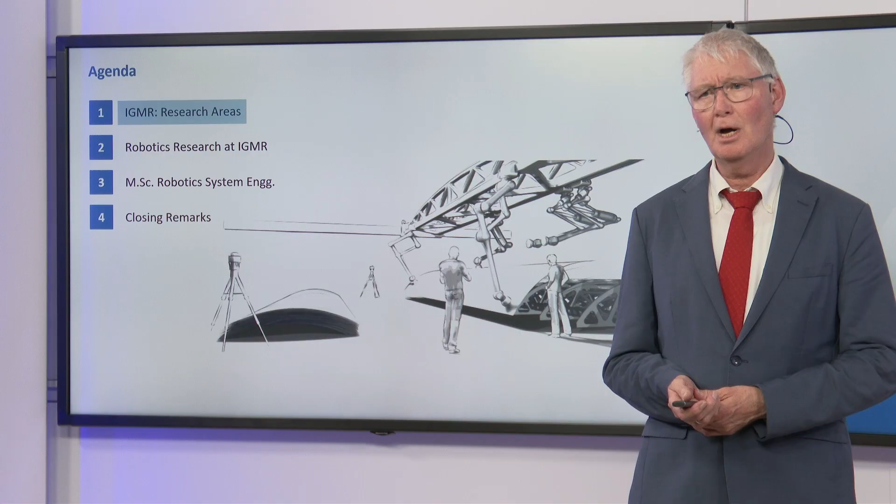The video you see right now shows the collective building of mechanical engineering. To show the size of mechanical engineering at Aachen University, this building, even though it's an 8-story building, houses just about 5 to 10% of mechanical engineering. There are a lot of other buildings where you find activities of the mechanical engineering faculty.

What you also see in this video is a bit of the historic scenery in Aachen. Aachen is originally a Roman foundation, more than 2,000 years old, and I just saw some news showing they excavated some human remains, possibly Roman, but maybe only Middle-Age remains, on one of the central plazas in Aachen.

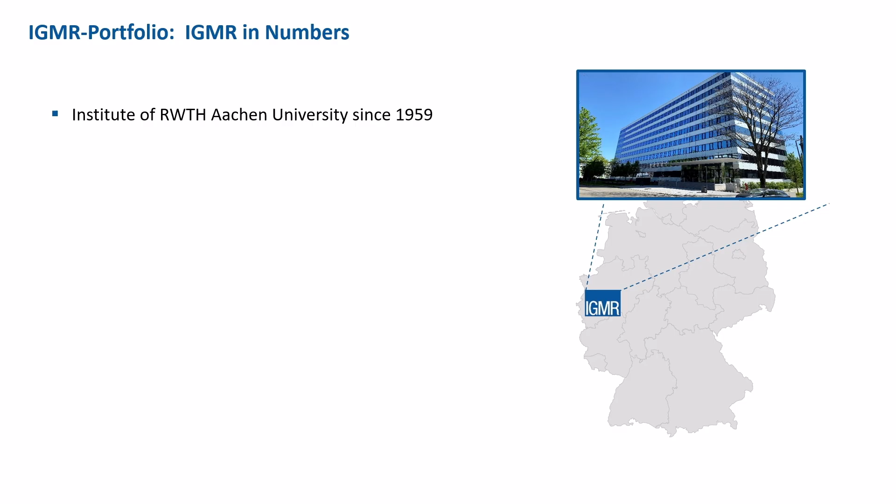My institute is not as old as that—it was founded in 1959. We are located close to Belgium and the Netherlands, in the westernmost part of Germany. So when you come to Aachen, you not only experience German culture, but also Belgian and Dutch culture. There are some similarities between these cultures, but it's a nice experience to also realize the differences.

Apart from me, there's also Professor Hüsing teaching and researching at IGMR, and you will meet him in at least 2 of the lectures offered within the Robotic Systems Engineering Master. Altogether, we have 30 people as research staff, almost double that number in student assistants, which might be an interesting experience for you also.

After 1 or 2 terms, once you have some grades on your list, we will be able to judge if you can also take part in teaching or research related to robotics.

Typically our lectures reach more than 3,000 students per year, so that's quite a large number, and our revenue is about 2.5 million euros per year, which we spend on teaching, research, and especially research together with industry.

At IGMR, we are not only doing research in the area of robotics, but also in other areas. One of those is mechanism theory and kinematics—some of you might already have taken courses in that area, covering crank and rocker mechanisms, grippers, and slider crank mechanisms.

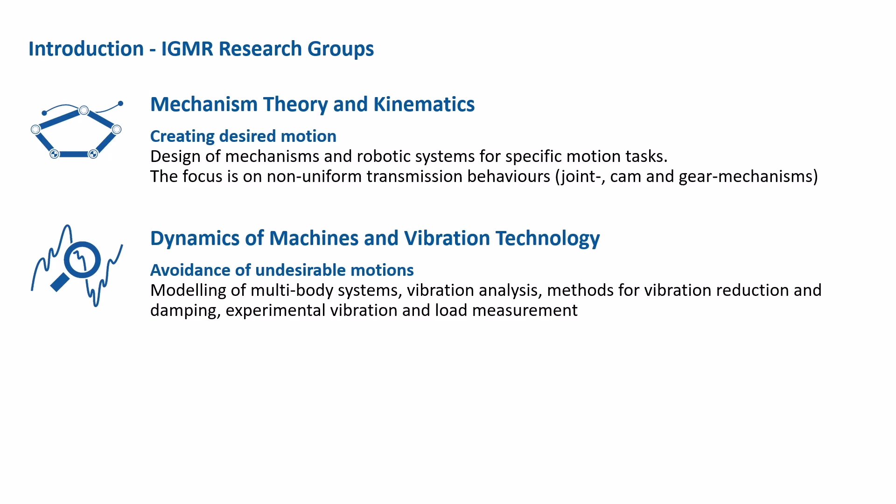We also deal a lot with dynamics of machines and vibration technology. I think you also know some specifics of dynamics, especially single degree of freedom, 2 degree of freedom, and multi-degree of freedom systems.

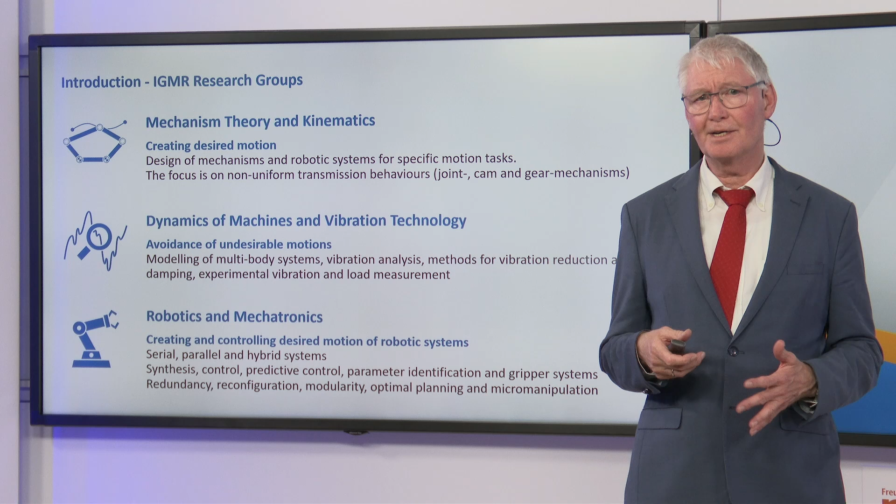And that is really by far the largest area in which we are doing research: robotics and mechatronics. But of course, all these three groups are not completely separated, but interact with each other, so that also in robotics, we take advantage of knowledge in mechanism theory and dynamics.

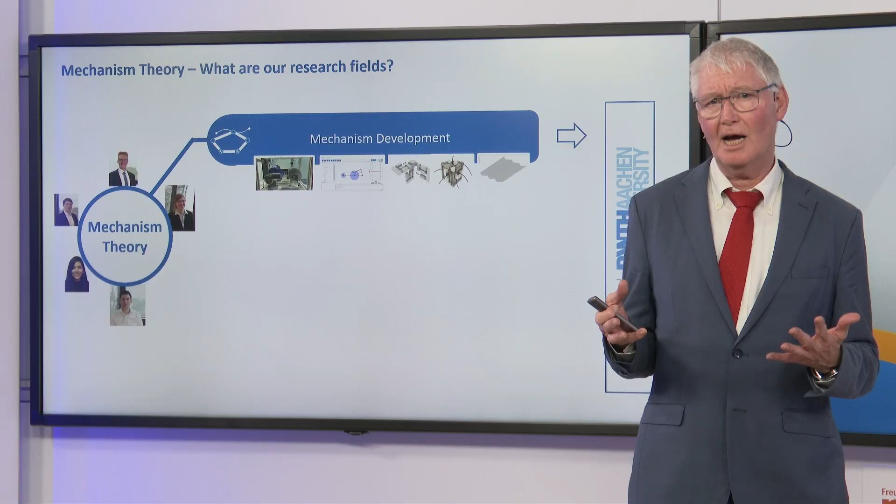The mechanism theory group deals with the development of different types of mechanisms, as I have mentioned before. Specifically, we are also developing software that enables designers who might not have full experience in mechanism theory to still develop solutions required for their machines and processes.

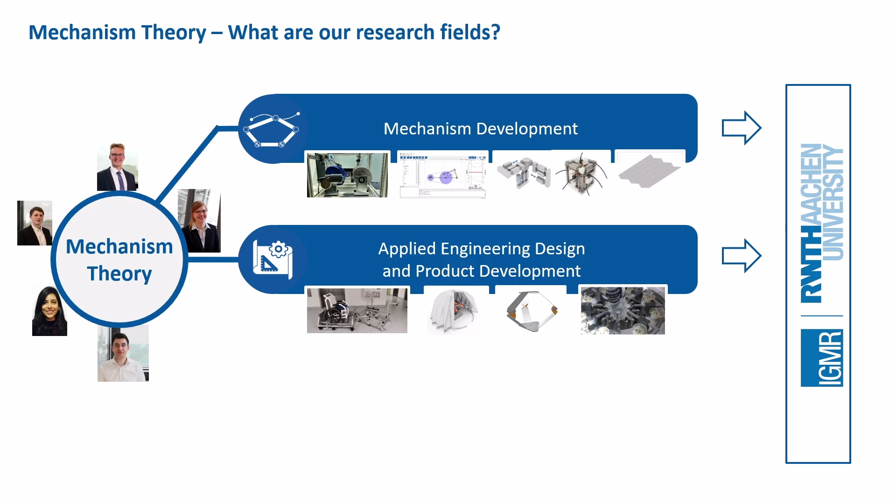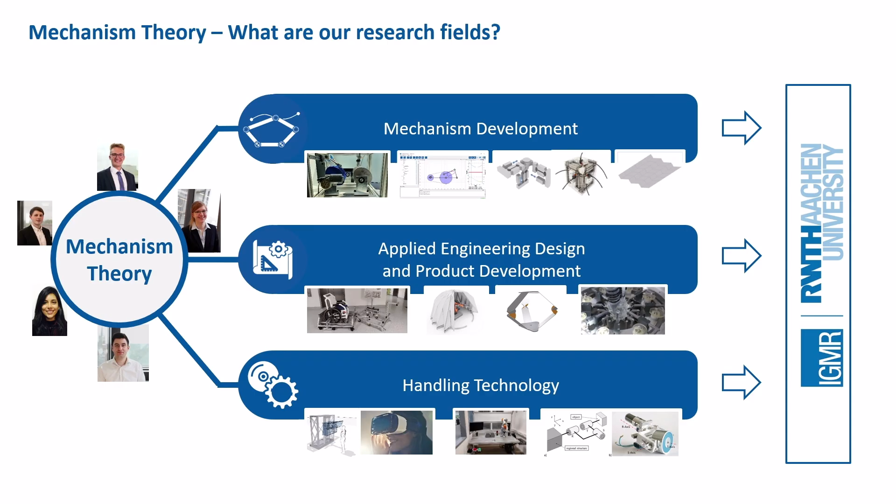Then we are also engaged in product development, but not only developing products, but also developing methods for product development. And then, as a link to robotics, we are also dealing within the mechanism theory group a lot in handling technologies. Handling technology means grippers and all kinds of end effectors that you want to use with a robot.

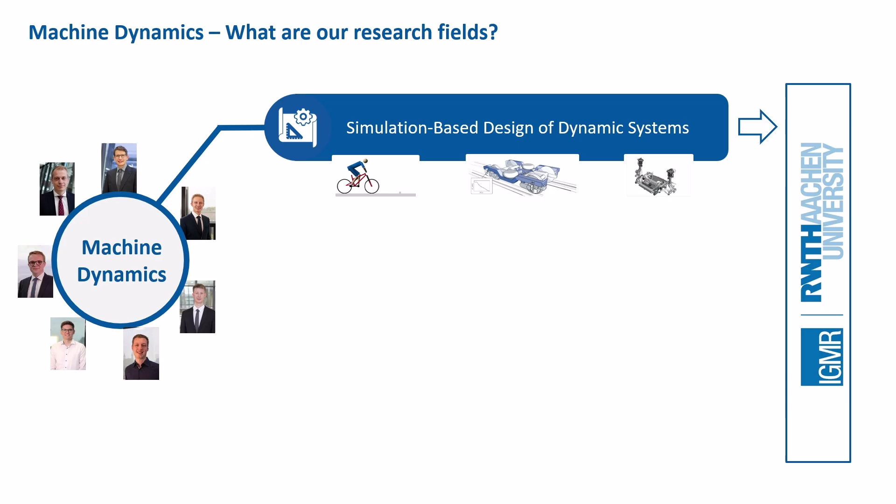I guess a lot of the students listening here from India are aware that there is a large program in India going on about creating new rail lines, also building new rail cars and locomotives, and that is really done together with the Siemens company especially.

And then on the right-hand side, you see a suspension system of a BMW, where we also did a lot of model-based, multi-body dynamics-based analysis of such a system, especially for driving simulators.

Then another part in dynamics which we do specifically is research in so-called pick-and-place robots, delta robots, and that is something that connects this dynamics group with robotics again.

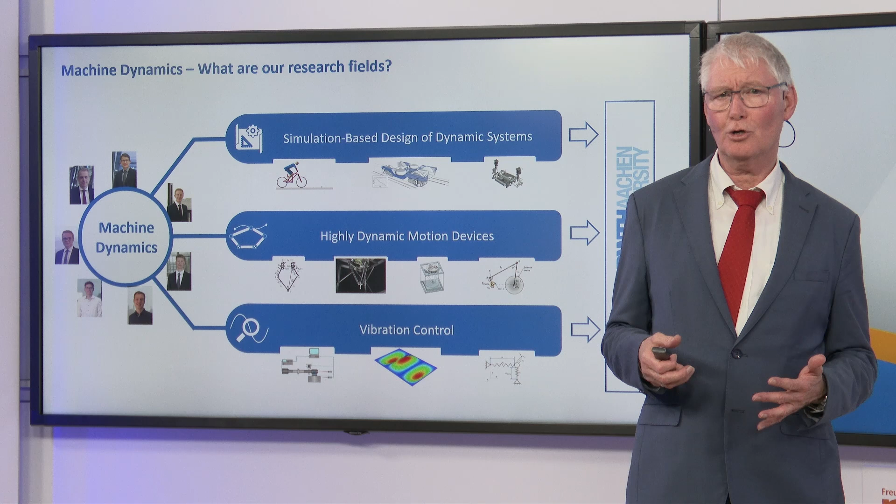And then we are also dealing a lot with vibration control, and talking about control, obviously control is sort of a necessity in all types of robotic research, because all the motions that you create with a robot need to be controlled in order that the system really functions well.

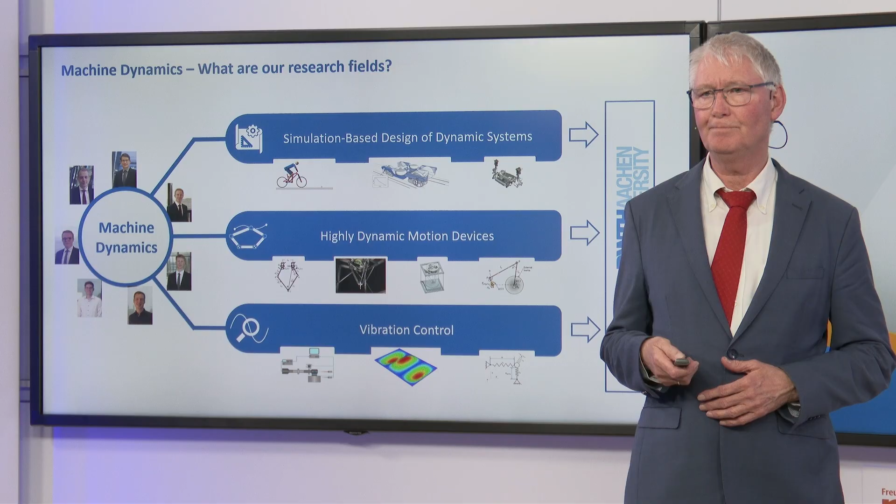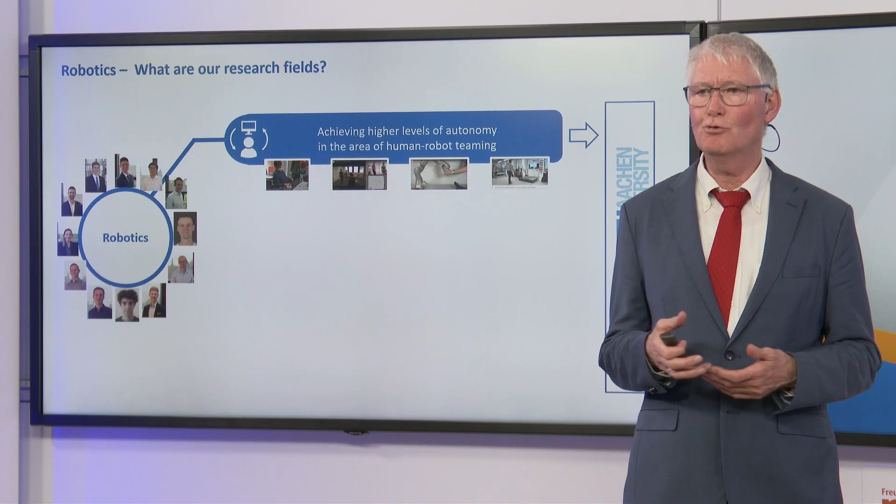Okay, so that is just a short overview about our research areas, and now I want to specifically show the robotic research. Of course, as already mentioned before, this is the largest group, and one part of the research we are doing in that area is to achieve higher levels of autonomy, especially in the area of human-robot teaming.

So I think you've learned already from news and so on, possibly with your own experience in robotics, that human-robot cooperation, collaboration is becoming more and more important. And of course, besides that, there are also new applications.

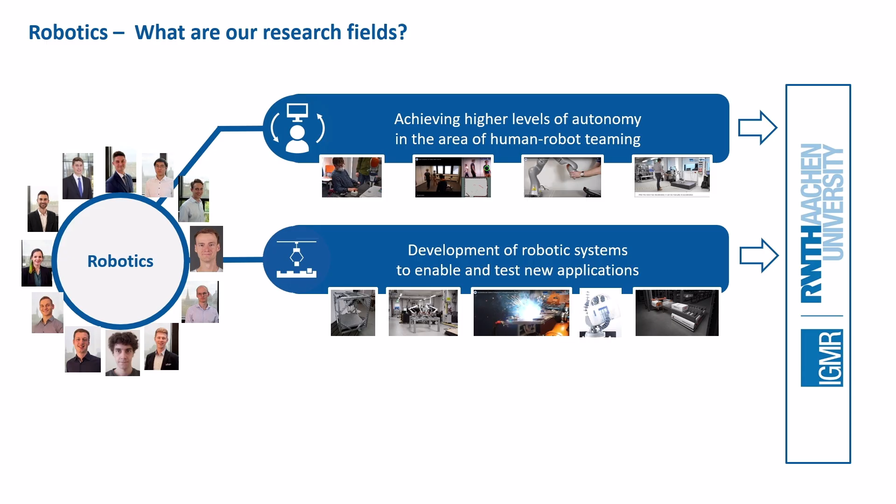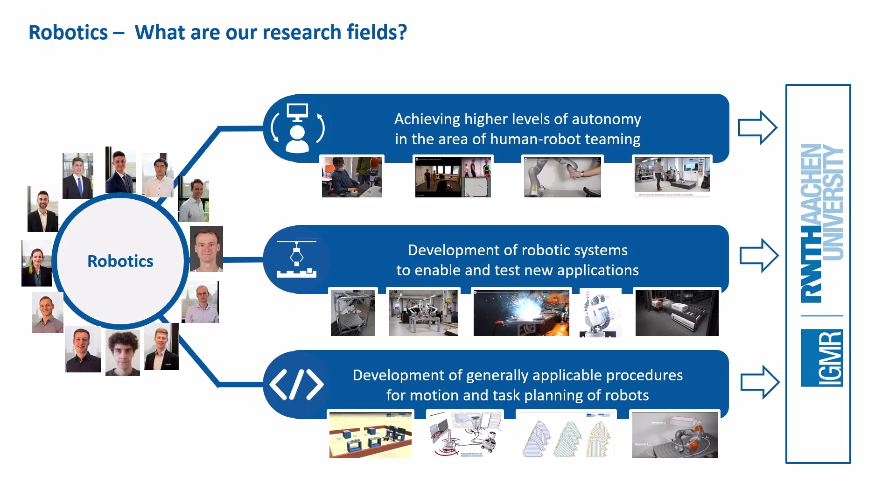We are dealing a lot with robotics in additive manufacturing, where we use the robot in order to improve additive manufacturing processes. And another thing that we are often doing is to develop procedures for motion and task planning.

And especially if we are talking about task planning, then it means that in a lot of scenarios, it's about a given state that needs to be transferred to another state. Possibly products are assembled and manufactured, and then we have to come up with a correct sequence of interactions between different agents. And such agents could either be robots, humans, machines, or mobile platforms.

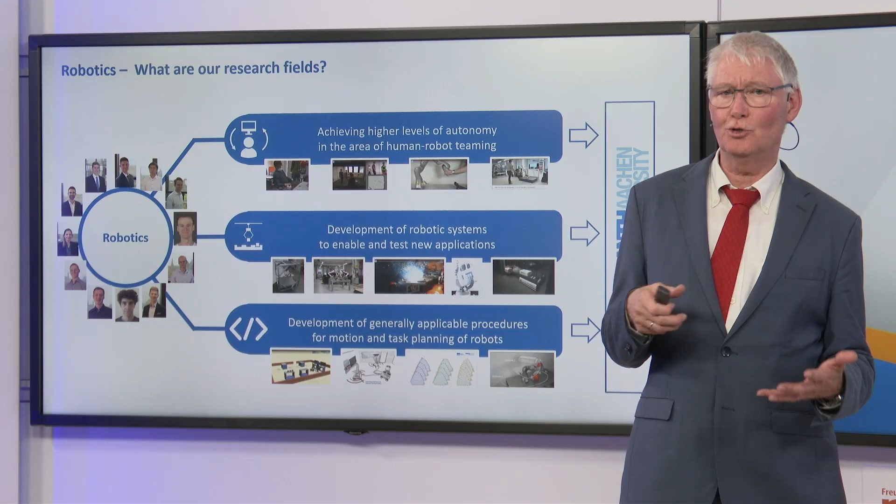And then, of course, we also have a lot of tools, and the combination of how to address the different agents, when to ask the agents what to do, that is what we are dealing with.

And now I just show, I think, three examples of robotics research. And the first one that I show is a European Union project. It's called SHEREC, and it deals with safe, healthy, and environmentally friendly ship recycling.

So the main objectives are that we want to involve and adopt innovative robotics, use data and AI systems in the ship recycling industry. Maybe some of you know that typically ships are recycled by just hauling them onto the beach and disintegrating them with welding torches manually. So there are a lot of environmental risks combined with that, and we want to improve the occupational health and safety conditions, and of course regarding the environmental impact, we want to prevent contamination.

So the contributions are that, first of all, we have a semi-autonomous preparation process using AI-powered drones in order to inspect not only the interior of the ship, but also the exterior, trying to identify hazardous materials.

And then we have databases that we can use for AI processes for planning. That means we want to automatically set up a recycling plan, and in order to do that, we use digital twins of the ship, consecutively building up that digital twin.

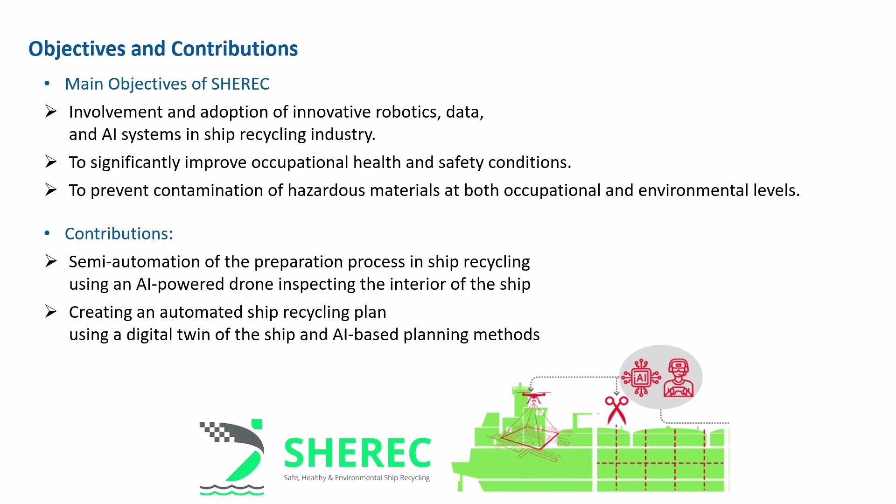Partly we might already have some CAD data of the ship, but typically in the lifetime of a ship, which may not be too long, maybe 20 to 30 years, there are also changes done to the ship, both interior and exterior, and not all these changes might be documented in a database.

Based on that, we can automate the cutting and paint removal processes, because in the end, what people are interested in are materials like steel, bronze, copper, and so on, which have a certain value and should be retrieved. Typically, if a ship needs to be wrecked, the price is still in the area of $1 million or so. So you want to do the whole process as quick and as low-cost as possible.

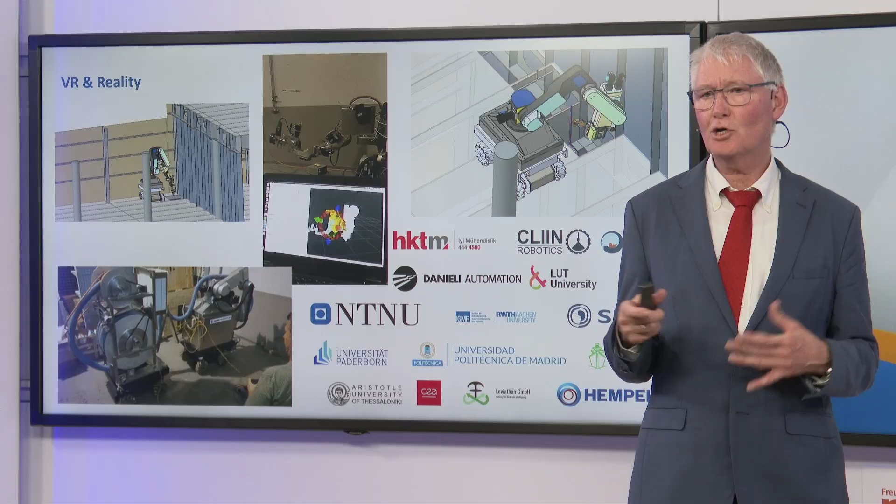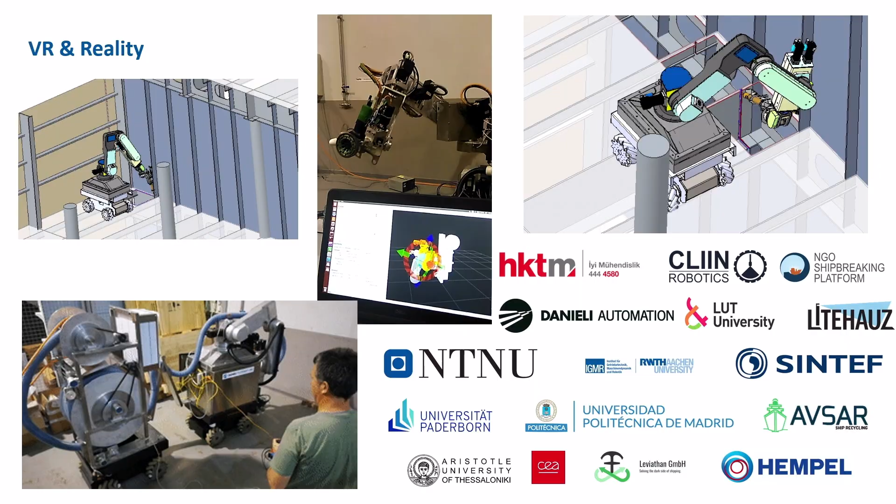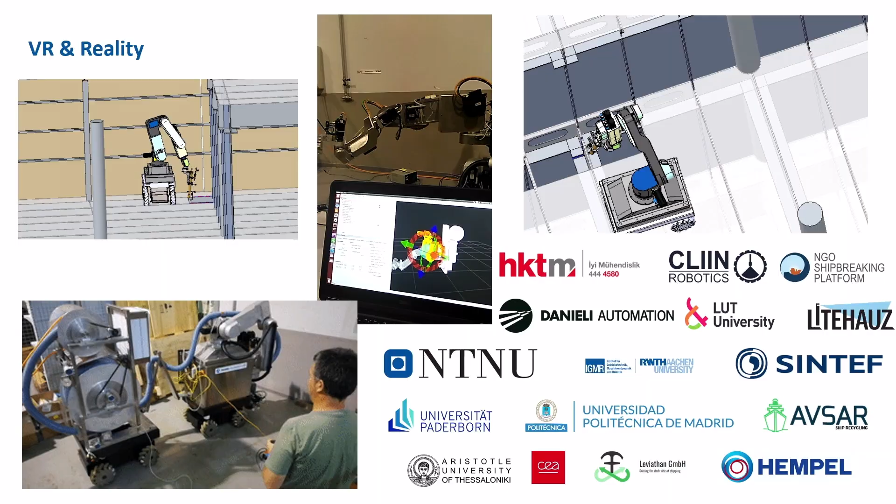This shows just a few animations of systems we are using within that project, and you also see a lot of different company names from all over Europe - Germany, Italy, Belgium, Denmark, Sweden, Finland, Greece, and also Turkey is involved. In fact, the lead in that project is an engineering company in Turkey.

Another research project I want to show here has origins dating back to when I was working with a Swiss company dealing with production of machines for glass manufacturing, for container glass manufacturing. The project itself is not that old - we started about 5 years ago, and it's about robotized job changes.

You possibly know that in all types of packaging or processing machines, different products can be produced, like different types of bottles, size and shape. Then I need to do a job change, and while doing it, the machine is not productive, so I need to do that job change as quickly as possible.

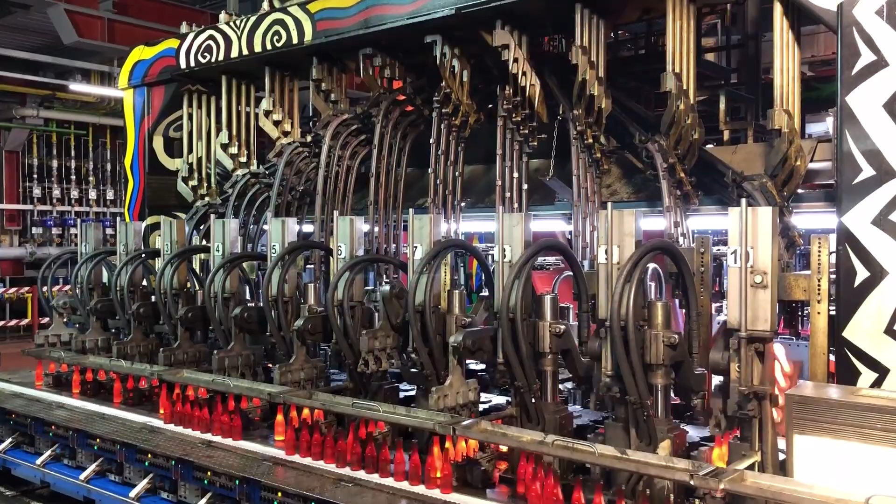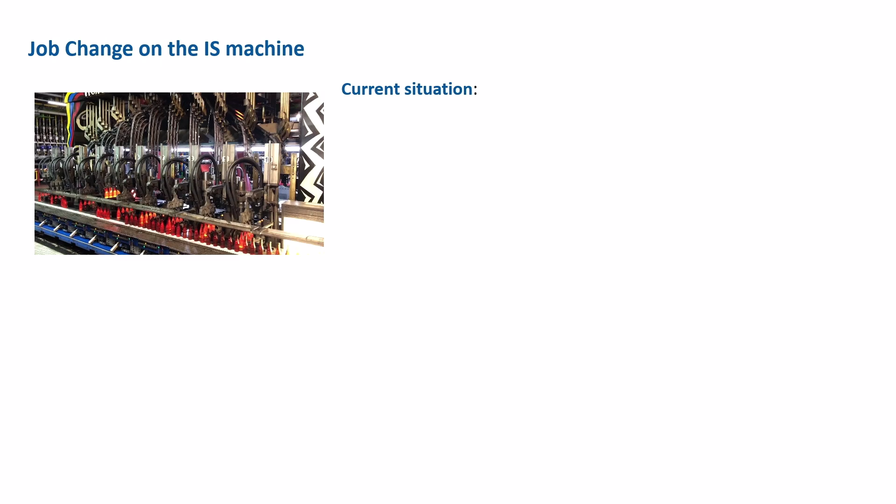Now the video shows such a machine. The bottles you see on the conveyor belt up front have a temperature of about 500 degrees C, so you don't want to catch them by your hands. The glass gob that drops into the machine has about 1000 degrees. So we're talking about an environmental situation that is not really that nice.

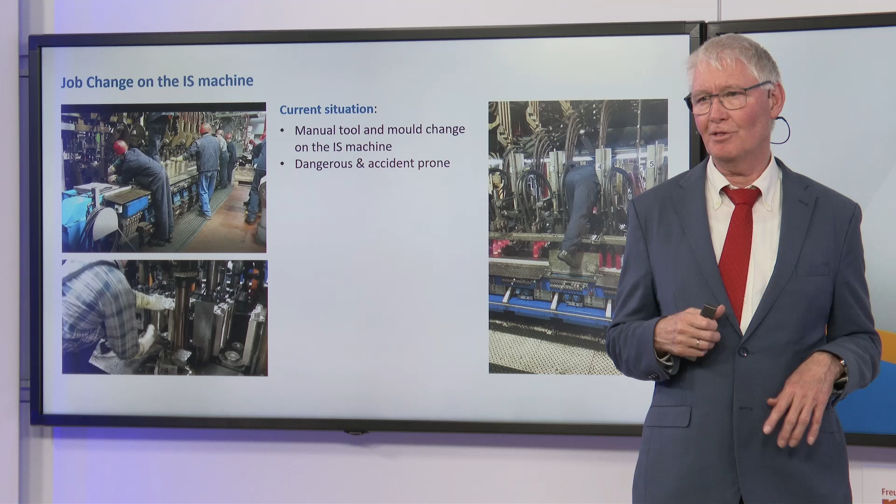So we want to replace the manual tool and mold change by robots, because it is dangerous and accident prone, and sometimes, as you can see on the right side picture, people are even climbing on that machine while hot bottles are still being produced. That's really dangerous and accident prone.

It's also labor intense, it's hard work. The mold parts may weigh up to 20-25 kilograms, and you always have to move over to get them out of the machine. The project question was: can we use robots at such a machine to relieve workers from their hard work? So the project goal was to analyze current work processes and identify suitable steps for robotic use.

Even though this is for a specific machine, you can think about a large variety of different machines where you try to find out how to use robots in the specific scenario. And that's also what you're going to learn when you register for the Robotic Systems Engineering Master - it's about development and illustration of realistic concepts.

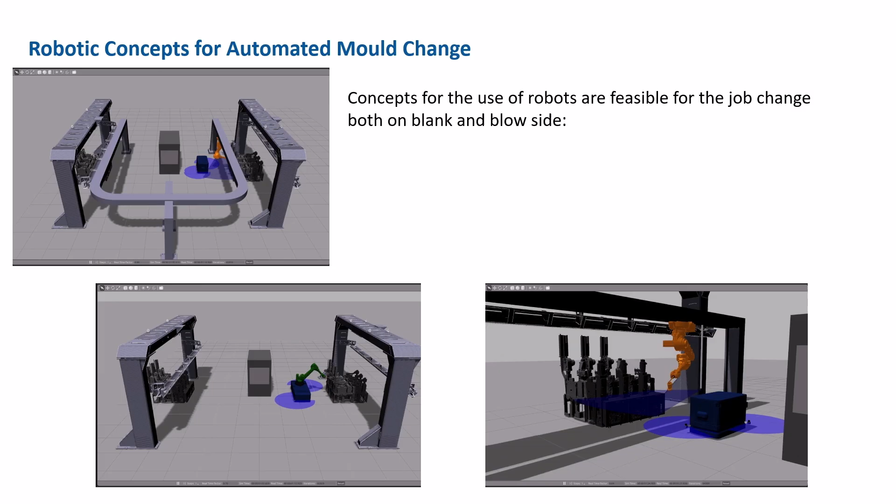The next slide shows some examples of that machine. In the upper part, you see the combination of two machines which could be simultaneously operated by one robot. There are different possibilities: either the robot is hanging from the ceiling or mounted on a mobile platform. In this case, the robot can be used for positioning, collection, transport, and also safety.

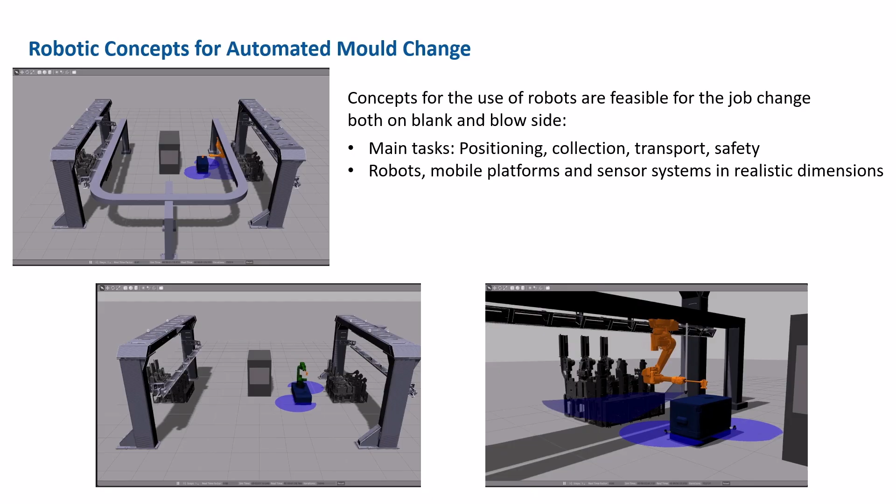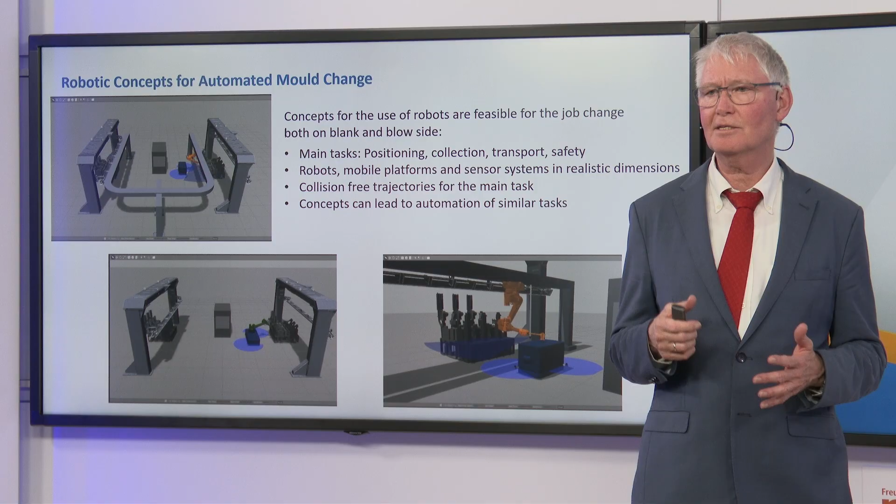So it's not only the robot itself, but also mobile platforms. And of course, for supervision, we also need suitable sensoric systems. Then the trajectories need to be planned collision-free for the main task. So effectively, we have developed some concept to do that.

Another example, from a similar industry, is about automatic robot-guided form scan and coating. And typically, what we are aiming at today when we're talking... sorry, I should take some water.

When we are talking about robotics in the industrial context, we are more and more talking about autonomous systems. And autonomous systems means that there shouldn't be any operator who line by line does the coding for the robot's motion, but somehow the robot should know how to move by its own, and it needs some sensors, but also some planning algorithms.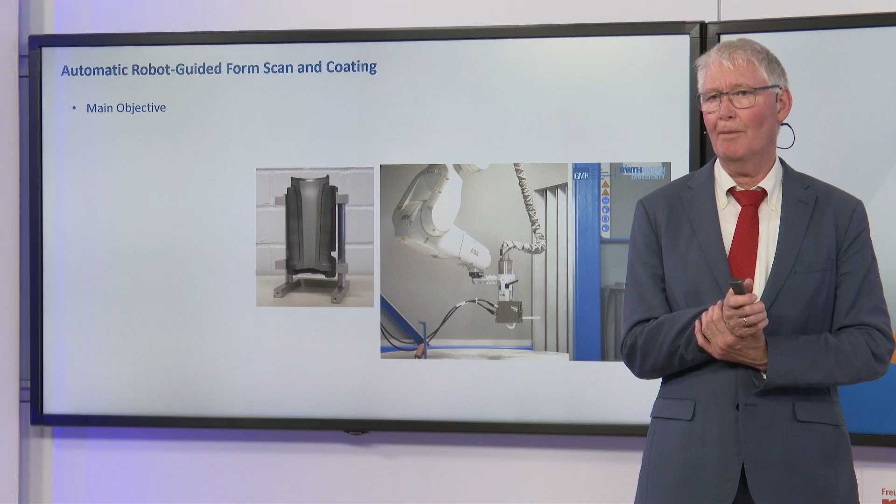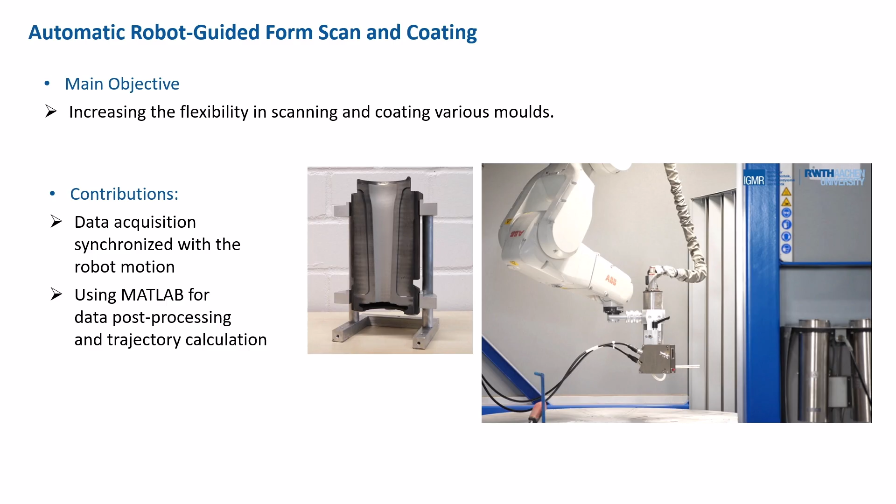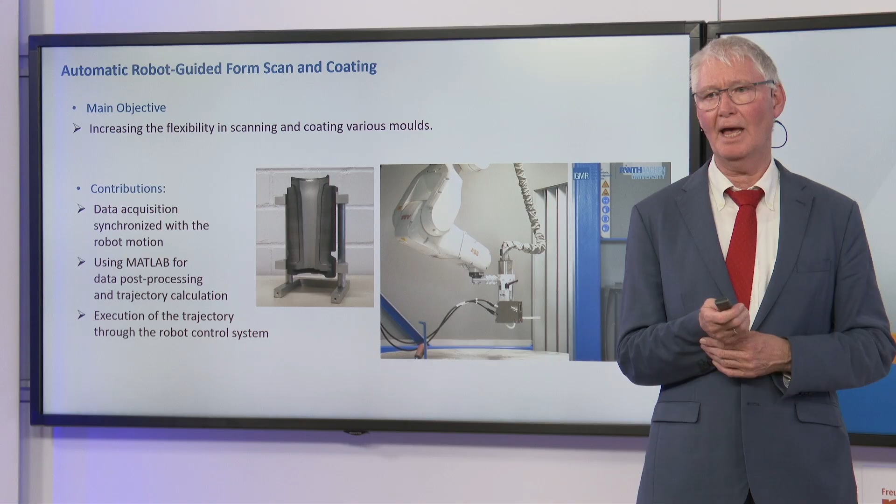Here we did something similar, and the objective was to increase the flexibility in scanning and coating molds. These molds are the ones used on the machine I showed before, and our contribution was that we synchronized data acquisition with the robot motion, and used MATLAB scripts for data post-processing and trajectory calculation. So the trajectory that the robot follows during the coating process is not programmed by a human, but automatically generated from data acquired previously by different types of sensors. In this case, we used laser scanners for that. Then the trajectory can be executed through the robot control system.

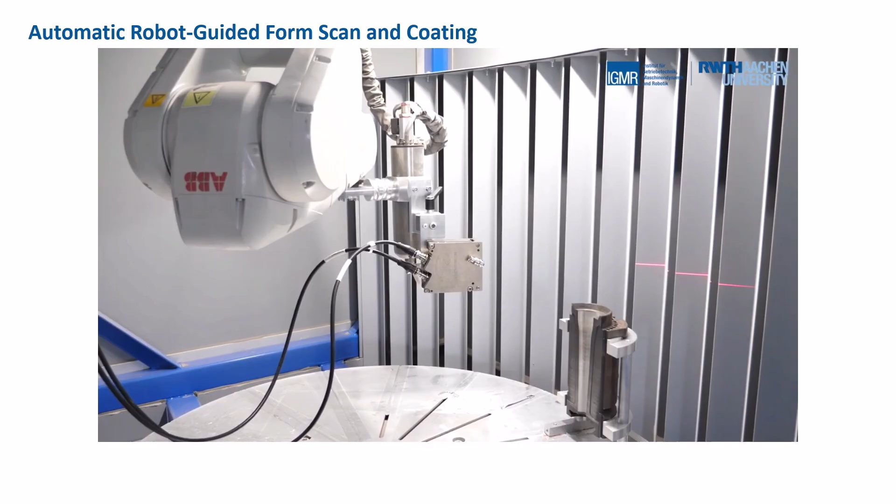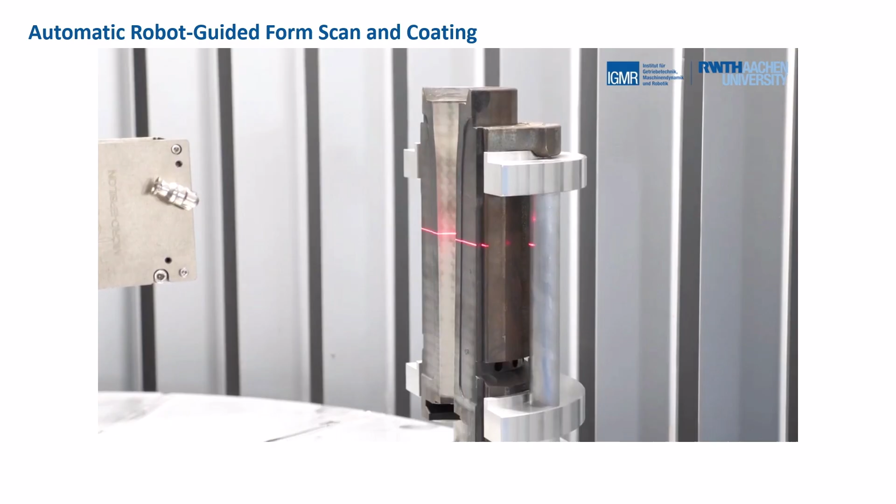And the following video shows how it is done. You will see, first of all, the robot carrying a scanning device, and with that laser scanning device, it automatically finds the mold, which is set up accordingly, and then it is scanned. Based on that scan, which you will see in the next sequence of the video, we can automatically generate the trajectory. So just follow that video.

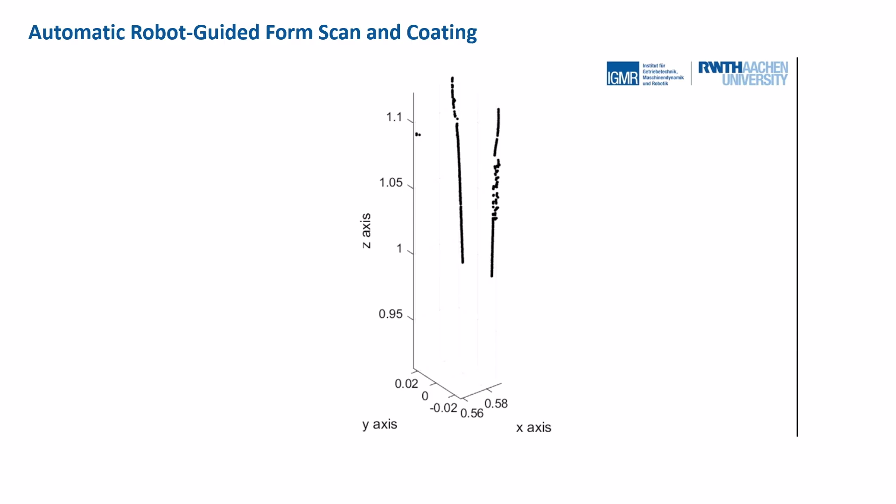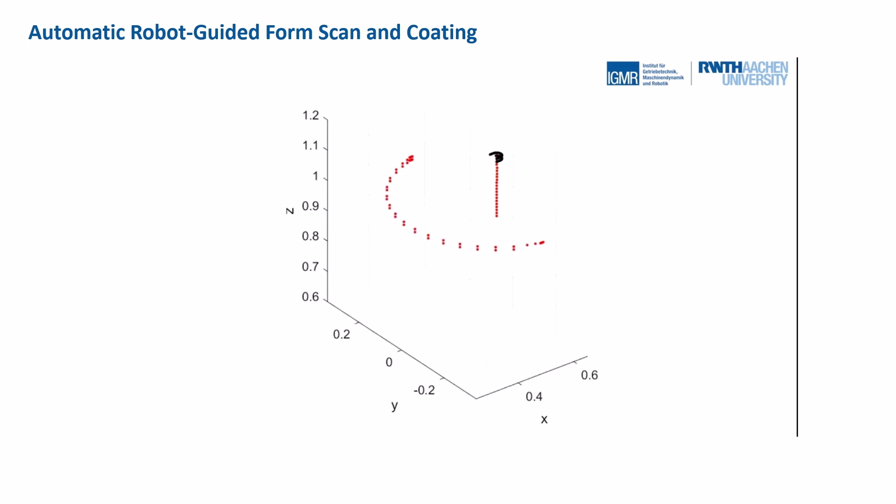That's a typical task. So this is how the shape is created, the shape that is detected with a sensor head. And then this is the automatic calculation. Of course, the calculation is quicker than the visualization, and during the process, you don't really need the visualization. This is just to show you how it is done. And then you see the spray head here, so it's about coating the mold using a spray.

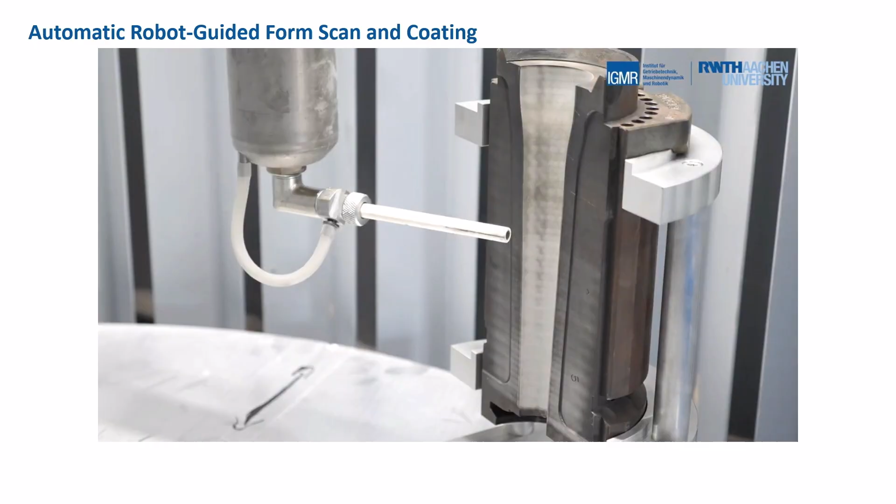What you see right now is just the dry test, and afterwards we will see the actual coating. The dry test is just for validation. In the real process, we will only have the spray sequence, which will start directly now. So this is now with the spray on, and we can do everything, and no human labor needs to be used for that.

Okay, I was talking about 3 projects. Now I realize it's 4, but this may be the most interesting one. It's a project called di.monta. In fact, it's a project that is a spin-off of our university or of IGMR. They had a first round of financing where they deepened the knowledge about what they want to do, and that is the enablement of automated dismantling or automated disassembly. Just now, starting from May, we will have another 18 months to further refine the idea, especially aimed at automated robotic battery disassembly.

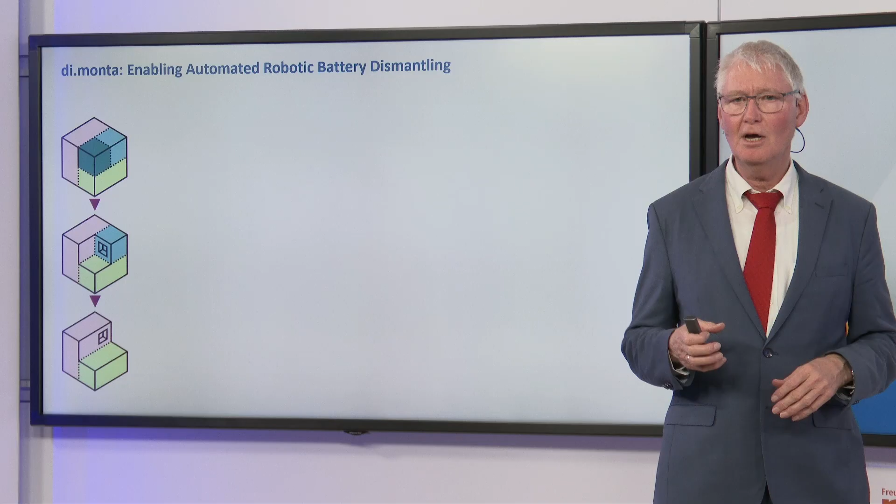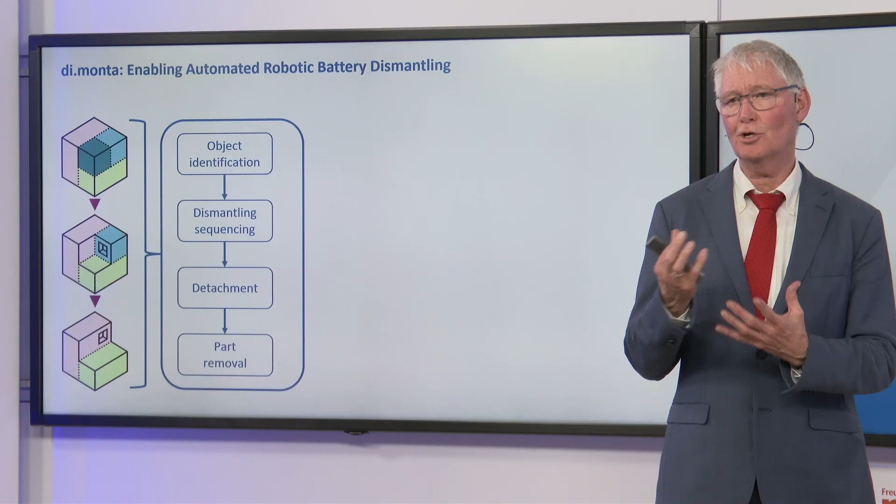So then we are not talking about the small batteries that you might have in your mouse or in your pointer, but the large EV batteries for electric vehicles. From the abstract point of view, in order to do an automated disassembly, we need to do an object identification, then determine the dismantling sequence, do the detachment, and then finish the part removal. And if we have a product made up of a certain number of parts, we have to repeat that process at least as often as we have parts in the assembly.

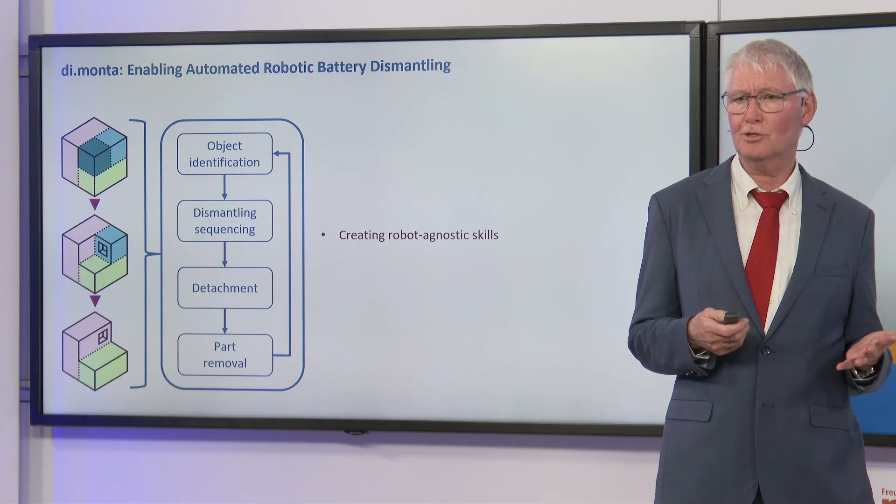And we want to do that by creating so-called robot-agnostic skills, which means one skill could be identify a screw, the next skill is unscrew a screw, then grip the screw, remove the screw. These skills should be created robot agnostic, because that enables the user to use different types of robots. For instance, screw detection could be to detect a very small screw or a large screw, and obviously for a small screw I can use a small robot, for a large screw I need a larger robot, but the skill should be exactly the same - a scalable skill.

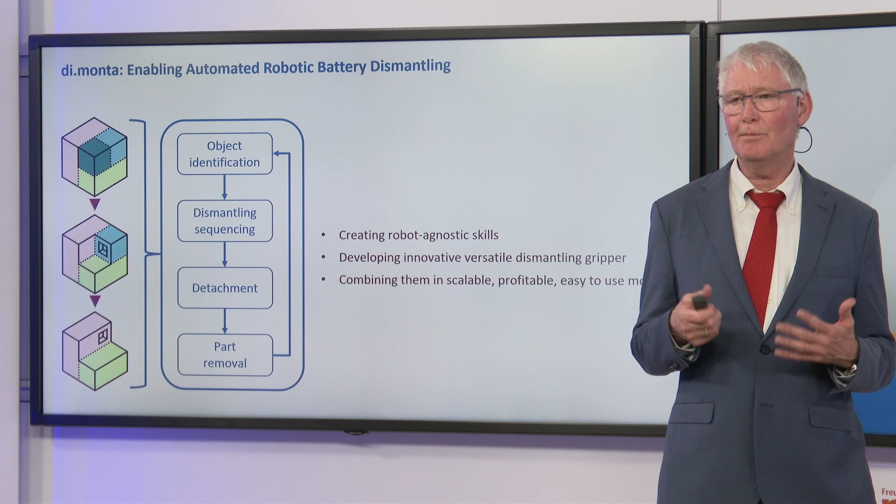And of course, in order to do that, we have to deal a lot with handling, and handling needs that certain innovative versatile dismantling grippers are developed and used. And then we will be able to combine all the skills in a scalable, profitable, and easy-to-use modules.

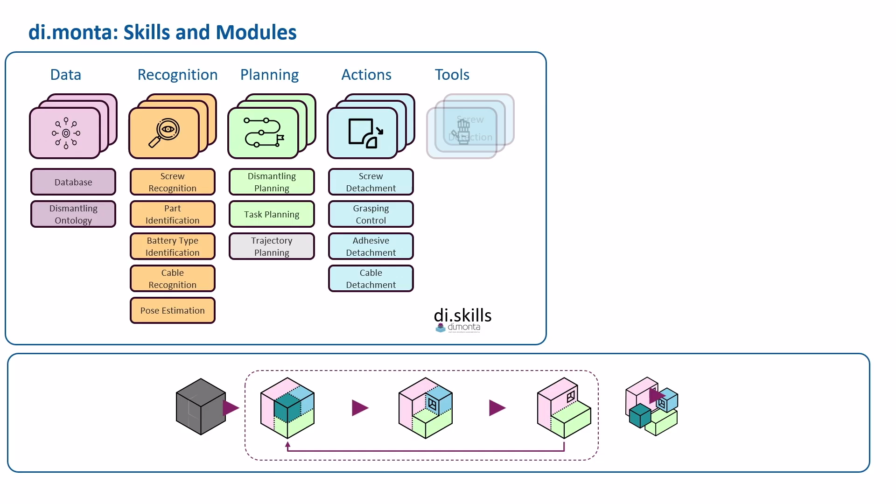And then typically what we have are skills related to data, skills related to recognition, to planning, to actions, and to tools. And then we take those modules and arrange them such that we have planning modules, screw extraction modules, or also gripping modules. So this is what we do.

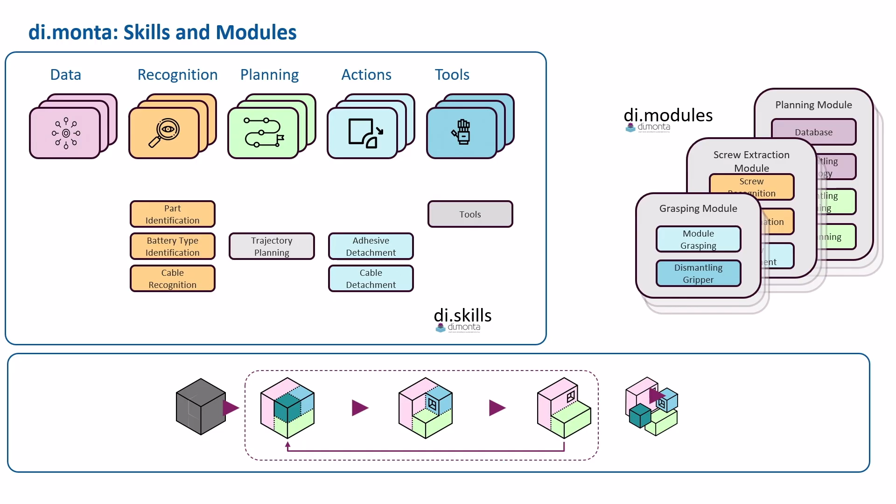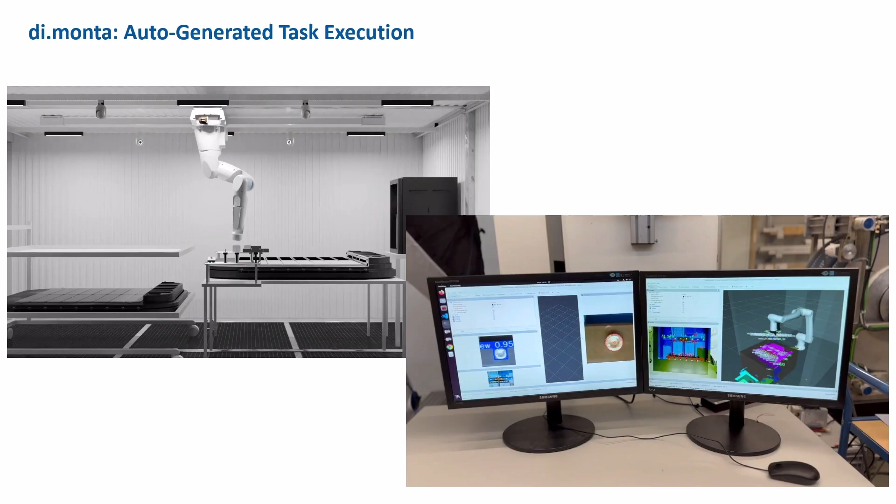Obviously this is on a very abstract level, but to show that this can be brought to reality, on the left-hand side you see an animation of how such a system could look like, and on the right-hand side you see the real-world example.

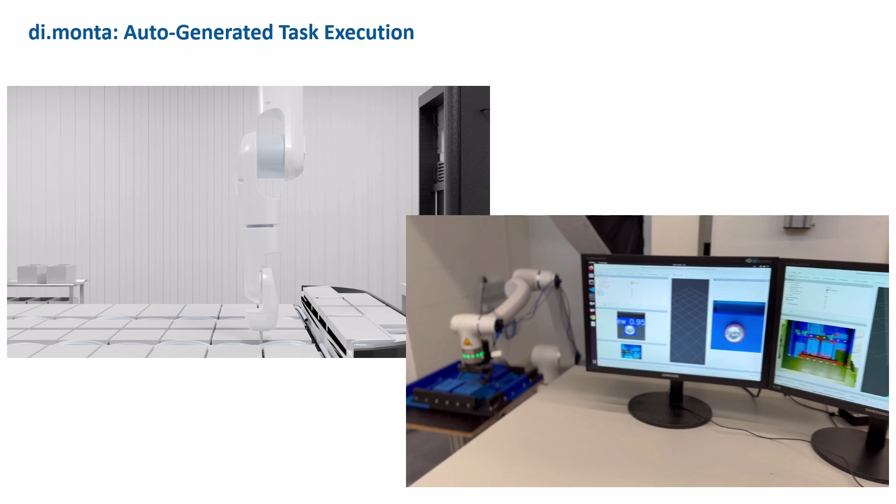Of course, in that example, we are not really dealing with a real EV battery, because that would be too dangerous from the handling point of view. But we have 3D printed modules which can be disassembled using the robot. And when you see the robot moving, there's no line of code behind that from manual path execution programming, it's automatic, because first the robot has a camera and inspects what is happening, and afterwards the coding sequences can be programmed. As you can see, the box is placed in the workspace, and the robot can identify where the screws are and start to unscrew them.

Okay, and yet another one. Already from the very beginning, introducing our robotics research, I was talking about human-robot collaboration. In this case, what we did was co-research with Ford Company. I guess everyone is familiar with Ford, and it was about the redesign of a workplace for disabled employees through human-robot collaboration.

So effectively, in this case, it was about a worker at Ford Motor Company in engine assembly who had developed problems with his shoulders, his arms, and so on. So he was no longer able to apply all the force that was necessary for the manual task.

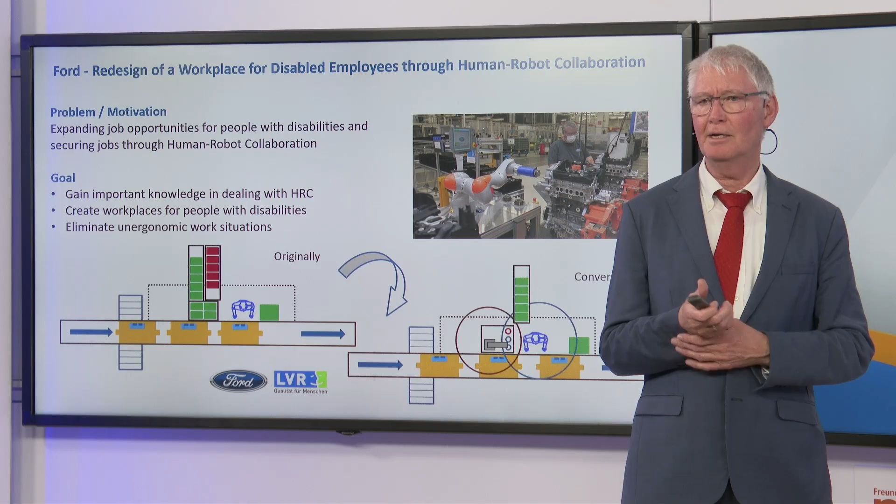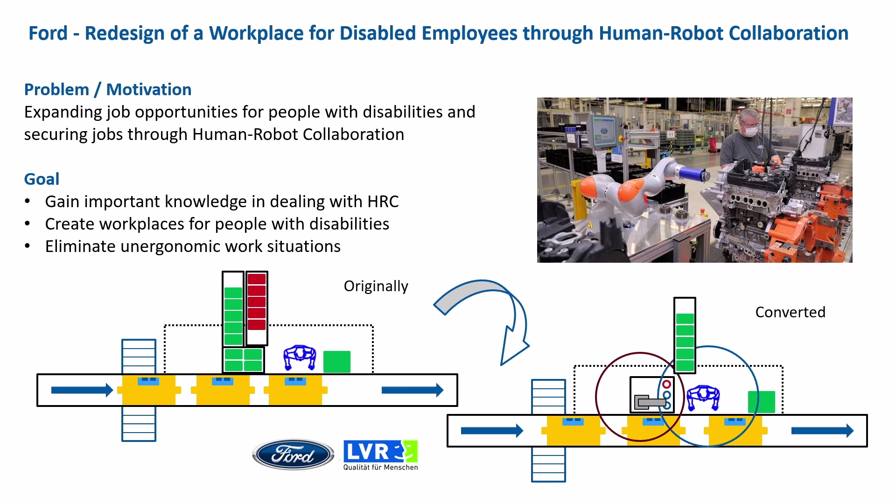And in the very end, we introduced the robot. You see the robot on the screen, on the photo. Even the whole setup could be reduced somewhat, was more space efficient. So from that point of view, that was very successful.

And it was extended to a project called ShareWork with artificial intelligence task planning. That is exactly what I mentioned before, coming up with an idea of how a given state can be transformed to a desired state. Also during the master course, you will learn about planning domain definition language, which helps in AI planning of such systems, and it can be integrated into ROS.

For those who haven't heard that, ROS is Robot Operating System, and a lot of the programming done on a robot will use ROS. If we apply that, we can realize high autonomy and high flexibility in planning and execution. We can easily define new goals. The way we do planning is such that if there are mishaps, we can easily replan and don't have to set everything back to zero. So we are very robust in executing our task, even if the execution fails.

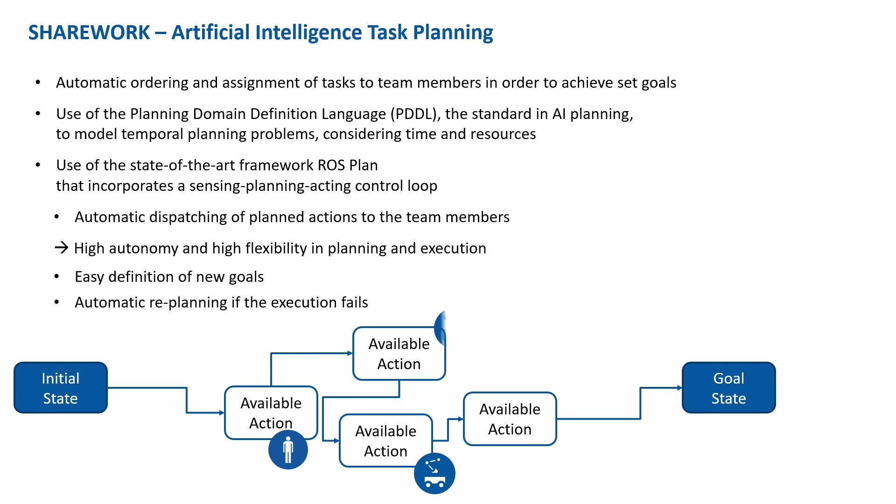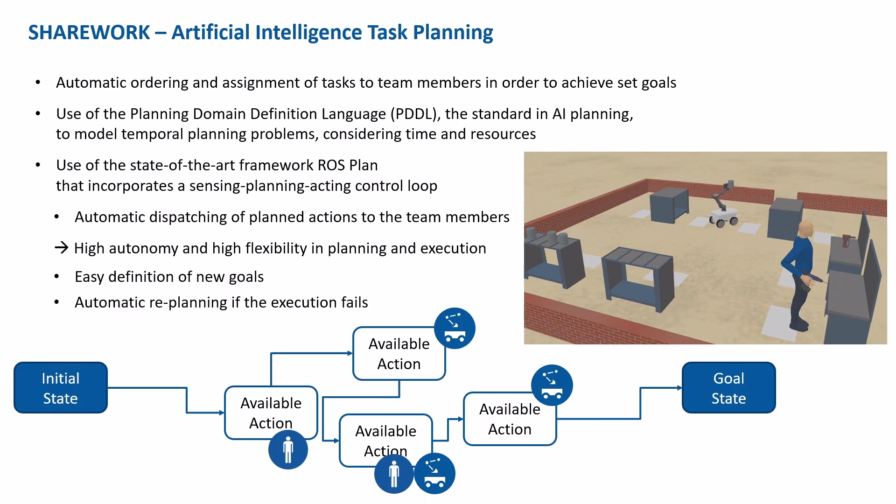This is just to show we have some initial state, there is a goal state, we have different available actions, and then it's about how to connect the different actions based on what agents we have, what tools we have, such that we can really reach that goal state. And this is just an animation which shows how that is done, with the cooperation of human and robot.

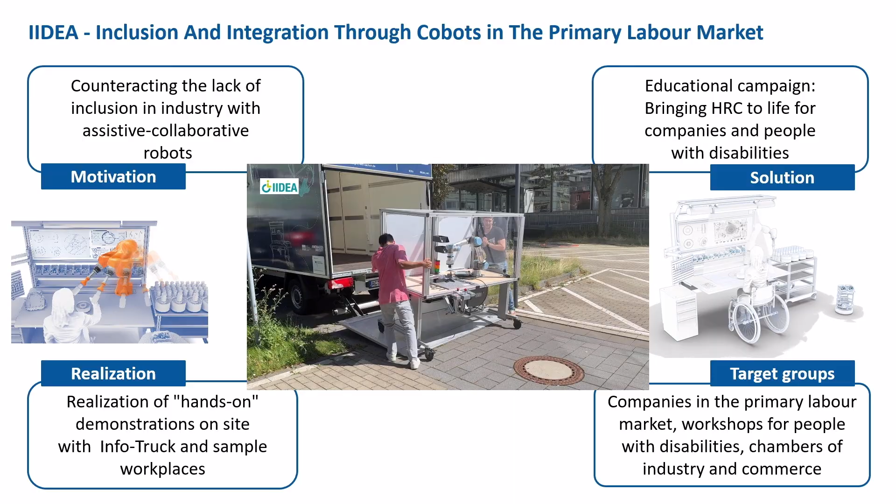And last but not least, a project about the inclusion and integration through cobots in the primary labor market. The motivation is, again, we want to include people who lack experience or possibilities for the first labor market, and our solution is to also start an educational campaign. We target different groups, and the realization is through hands-on demonstration. The video here shows some robotic workplace.

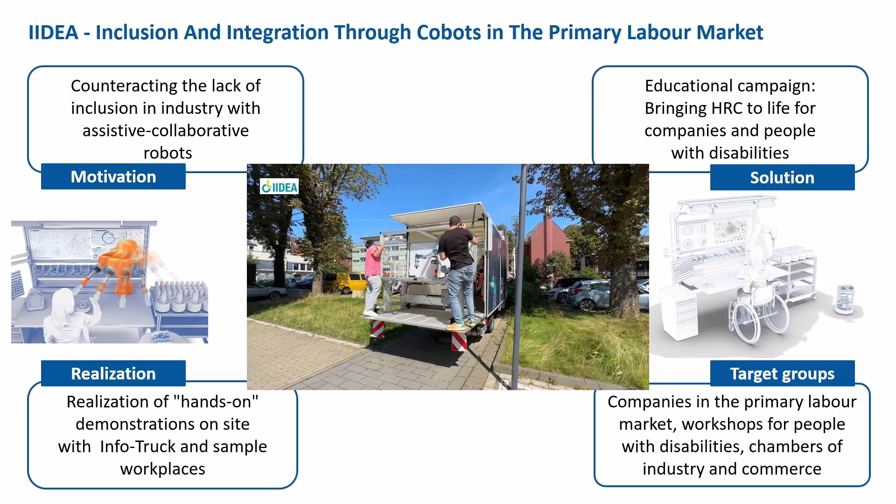We also developed a truck for that, and with that truck we drive to different target groups throughout Europe, through different regions. I think up to now we have visited 40 to 50 different companies, fairs, institutions, and so on, to advertise inclusion and integration through cobots.

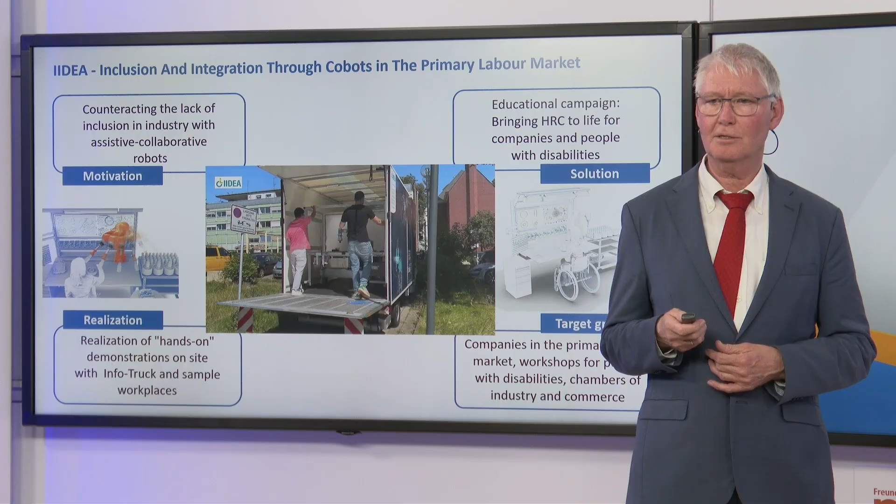I almost forgot about industrial robotics for intralogistics. We work together a lot with industrial companies. This is one medium-sized industrial company in Germany for intralogistics solutions, and they are also manufacturing modular fleets of AGVs, autonomous ground vehicles. Don't mix that up with automated guided vehicles - these are ground vehicles which are really autonomous. There's no induction loop in the floor, they're just finding their way through sensors, and of course we need to develop according navigation algorithms for that.

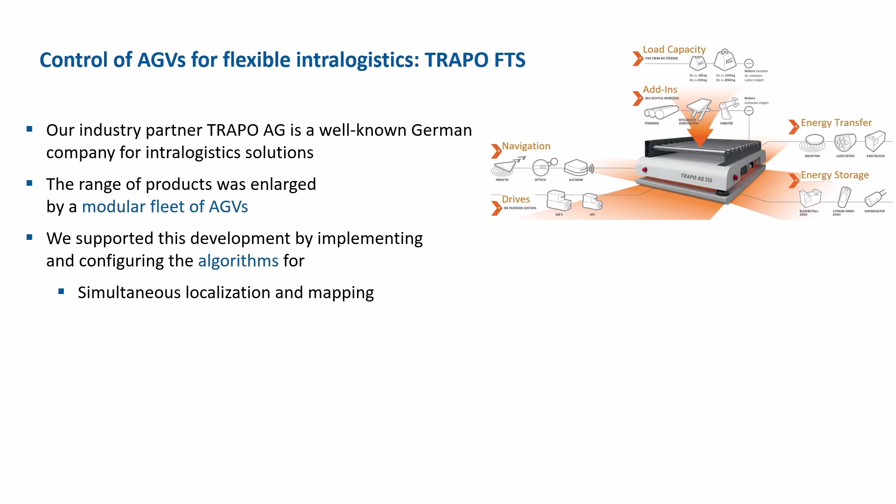Some of you might have already heard about simultaneous localization and mapping. If you think about simultaneous localization and mapping, that is something humans do all day. You have found your way to your office by localizing yourself, seeing where you are, and you're also doing mapping, so you have some internal map of your environment. That's what humans do very easily typically, but for machines that's much more difficult.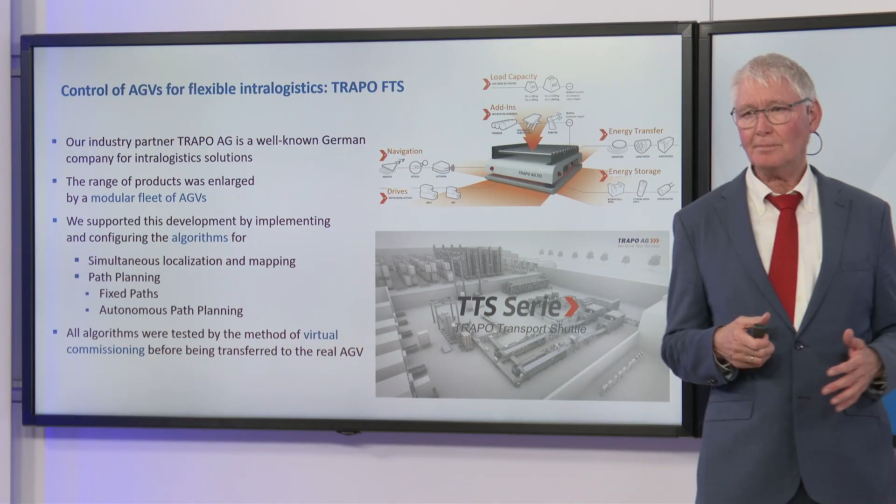And of course it's also connected with path planning. But before being able to do path planning, you have to localize yourself, or the machine has to localize itself, and do a mapping. If we're doing path planning, the traditional way would be fixed path, but autonomous path planning is much easier, because then it's much better to not run into collisions. This is just an animation of such autonomous vehicles.

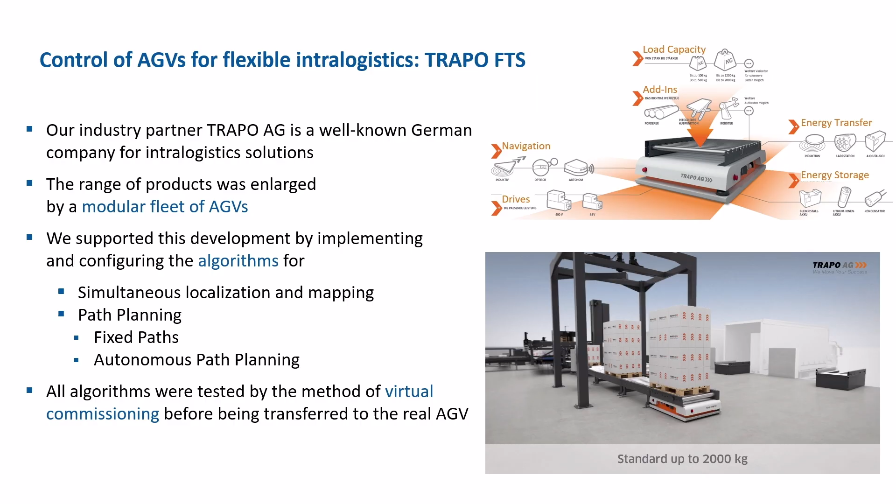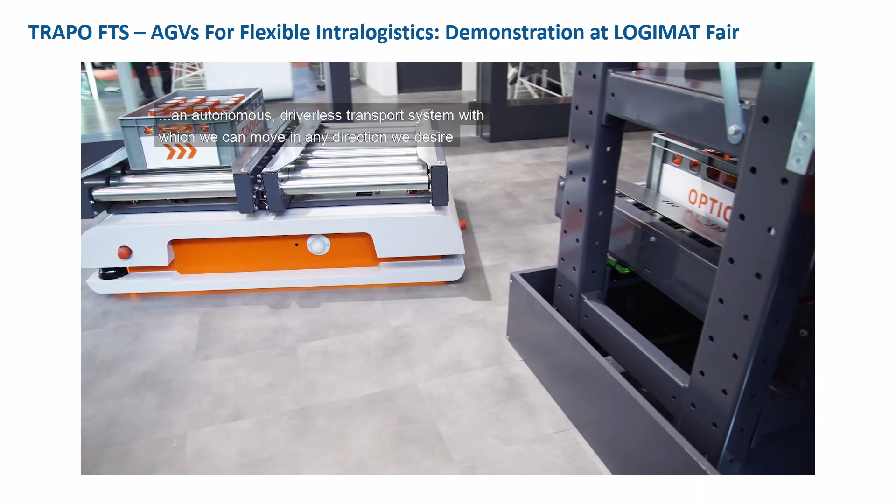I don't have to show the whole length of that video. This is another video, because here on a fair you see that company. The guy that you see here is one of my former PhD candidates, who at that time, like 3 years ago, was the head of the development department. Now he moved over to another company. But that's also how typically collaboration between academia and industry starts, through former PhD candidates.

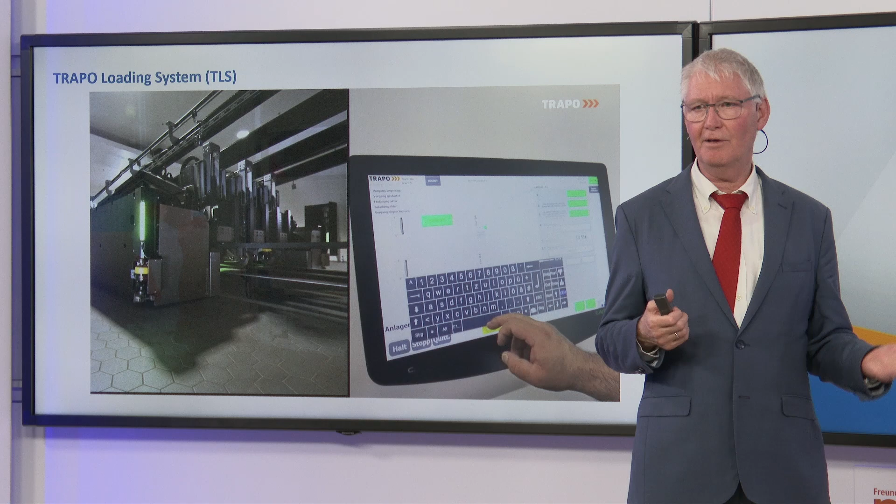Another example is the truck loading system that you see here. It's also about autonomous logistics, and in this case it's sort of a large forklift for 3 Euro pallets at once to be loaded into a truck, and that being done without the intervention of humans, because there are, especially in the food industry, a lot of companies that are producing 24/7 in the week, 24 hours, 7 days a week. This is doing it autonomously, and in a way, even though it looks completely different, this is also an industrial robot.

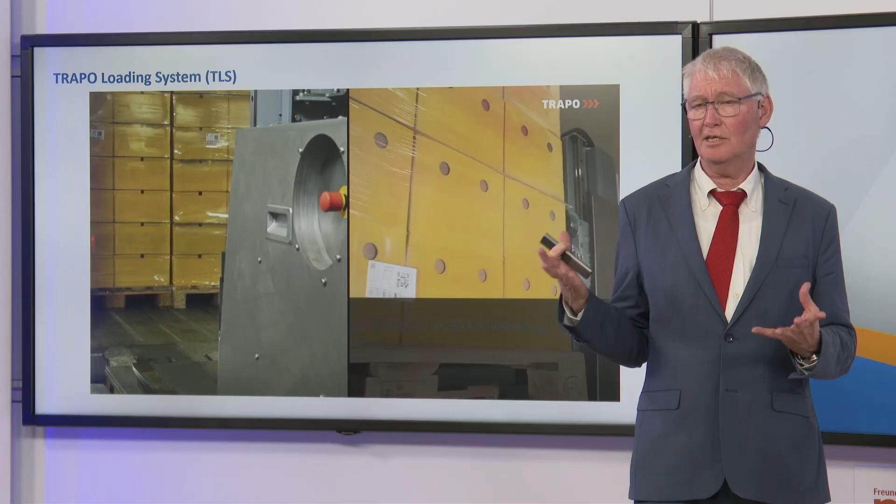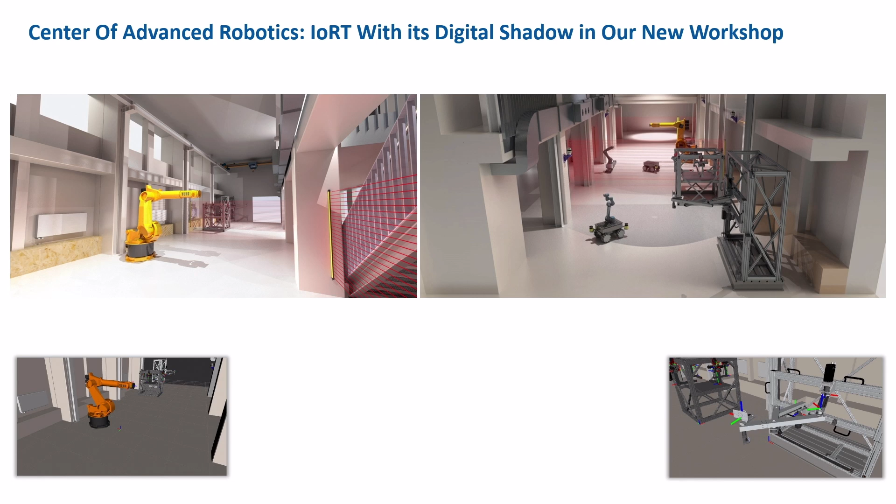Where do we do the development for such systems? That is our Center of Advanced Robotics. This is just sort of animations and CAD, but if you go into that lab as it's originally built up, you see a lot more robots than just the few robots in these pictures. It's also about IoRT architecture for robotic units and sensors, and it's service-oriented, standardized, and of course safe access.

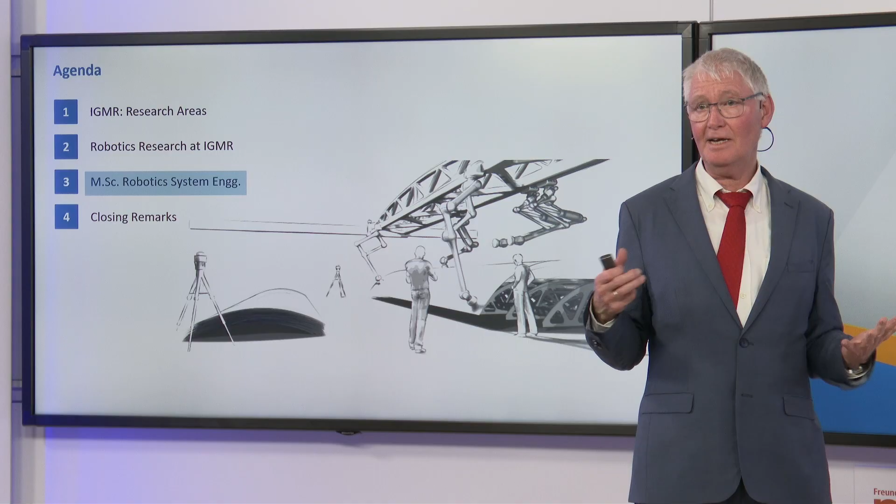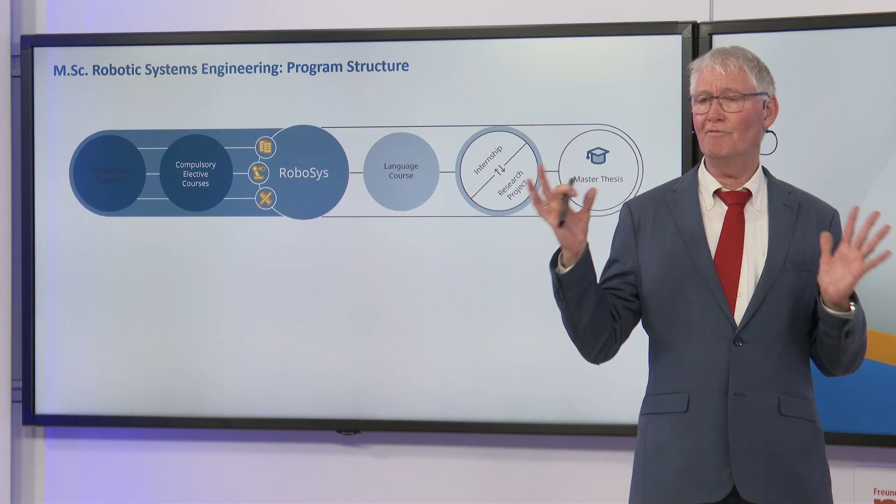So new from winter semester, we have 3 exclusive study tracks. One is focusing on data and AI. The second one is on autonomous and sensor-based systems, and the last one on development and design. Typically, you should understand that if we're talking about robotic systems engineering, it is not only about developing, designing a robot, but it's a complete robotic system where we have to talk about the sensors, the machine that is cooperating with the robot, and so on. So it's a wide area that you will cover.

In data and AI, when you choose that study track, you get the understanding of concepts, algorithms, and application of robotics, especially in the area of data. You will learn how to design such systems, implement, apply, and evaluate them, because when developing a system you always have to judge between different possibilities, and your decisions should be based on understanding your system. So it means you can apply artificial intelligence technologies.

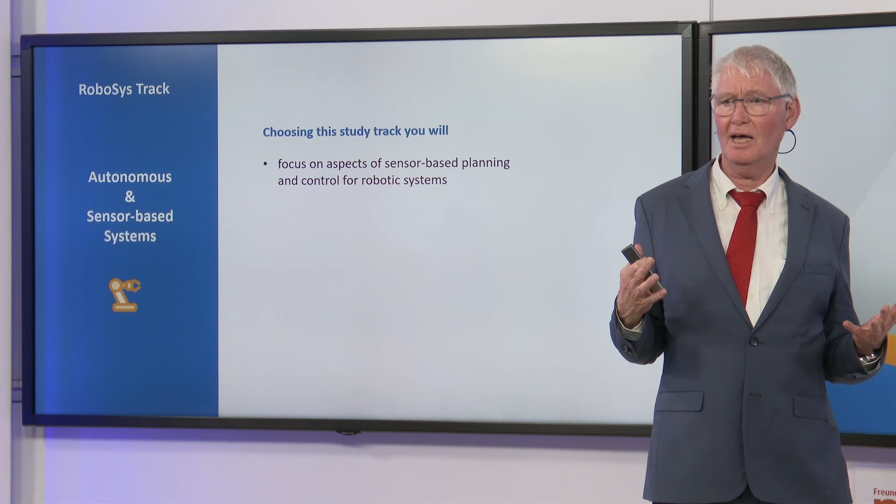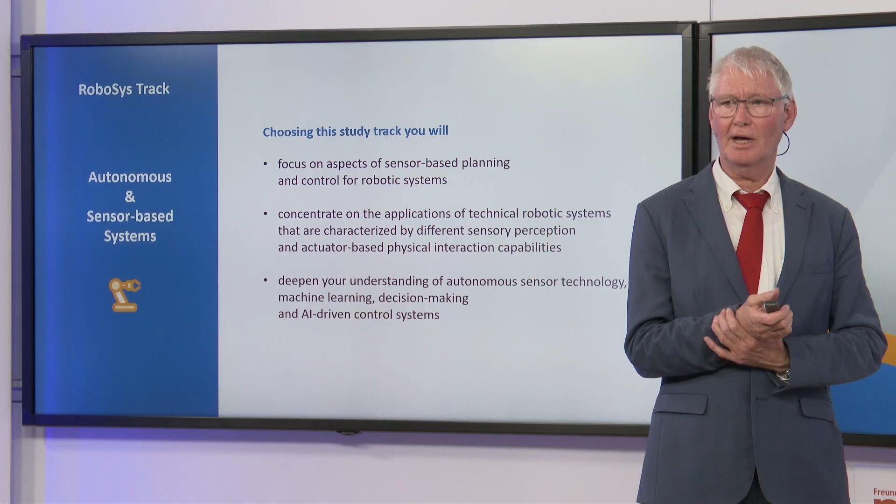The second track is autonomous and sensor-based systems. The focus is especially on sensor-based planning and control for robotic systems. You will also get to know a lot about control in that master course, concentrating on the application of technical robotic systems such that you can characterize different sensory perceptions and judge actuator-based physical interaction capabilities. You will deepen your understanding of autonomous sensor technology, meaning the data gained from the sensors through machine learning will be produced such that the system itself can decide what to do in order to control the system.

In development and design, possibly the most conservative of the three tracks, you gain understanding in the development and design of robots and robotic systems. You will be the one able to design, implement, apply, and evaluate complex robotic systems.

If you think about the three tracks, in a real company where robotic systems are designed, you will probably always work in a team, where some have experience in development and design, others have experience in sensors and autonomous control, and others know about AI and data. So no matter what track you aim at, you will always have the possibility to later have a really good job in industry.

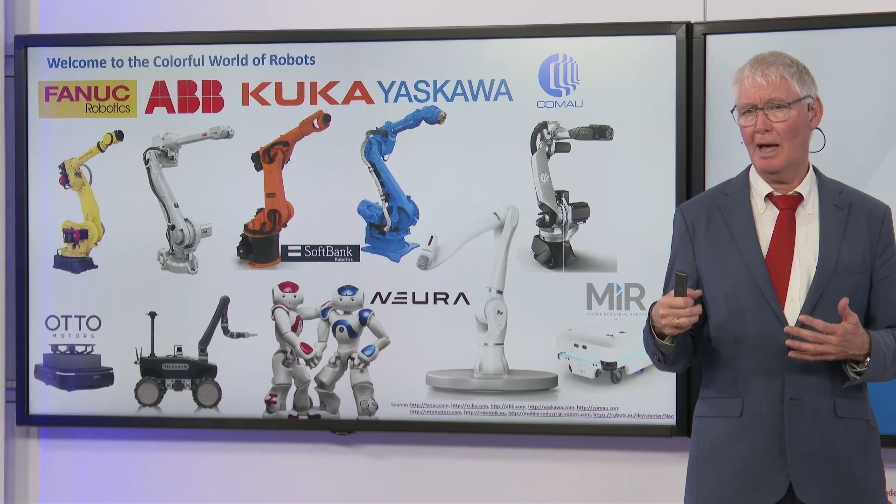Mitanshi asks about her background in computer science, beyond the German Engineering College course, and whether there are other prerequisites or must-have knowledge regarding mechanics. The professor responds that if she attended the GEC course, especially the mechanics lessons taught there, that should be enough, because additional knowledge in kinematics and dynamics is taught in courses that are either compulsory or elective.

Typically in the first term it's quite a workload, though not overwhelming. Towards the second and third term, students get a much better feeling of what additional research they could take on.